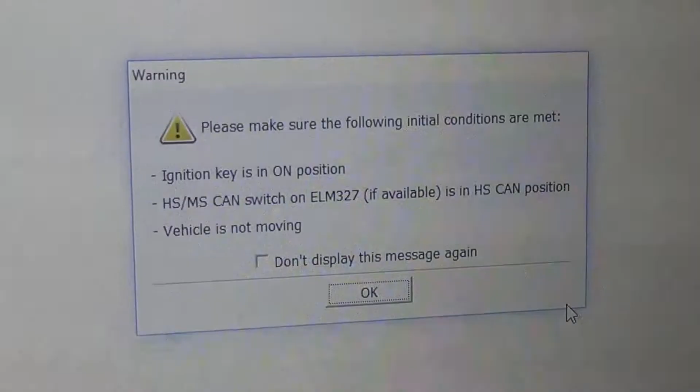So let's get started. Plug in your OBD2. Make sure it's on high speed. And then I will plug it into the laptop. Alright, next we'll bring up FORScan. So this is the initial screen. You want to go down here first to the connection symbol, connect, and it gives you this: ignition is on, make sure it's on high speed and the vehicle's not moving. Click OK.

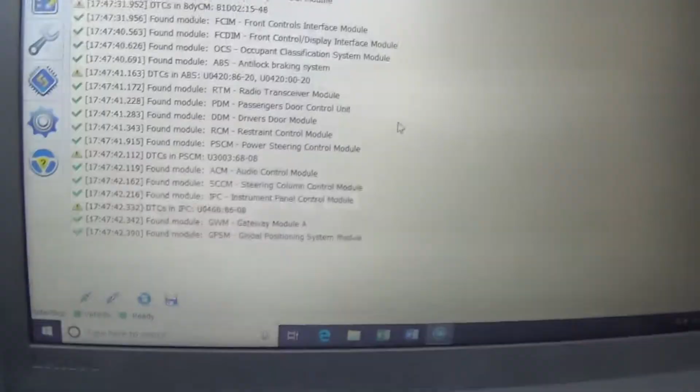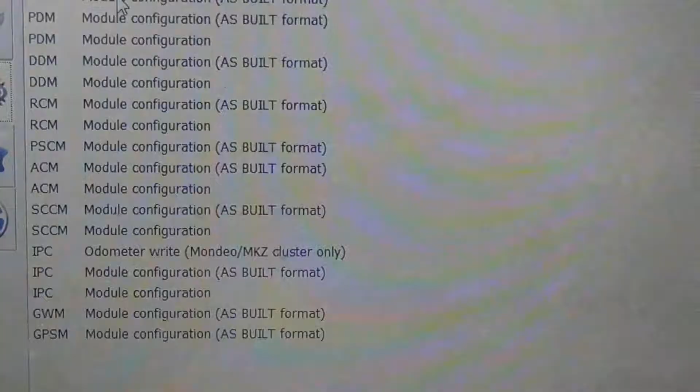This is my profile for the Fusion. Set your switch to MS or medium speed. Click OK. And we are ready. Alright. So there's two different ways to do this. I'm going to show you the first easy way. Go to your microchip here. And first one we want to do is the daytime running lamps. Now this one has it set up already, a little shortcut. So we're not going to go to the as built and change the code. We're going to go to the module configuration here. Down here at the bottom, click play.

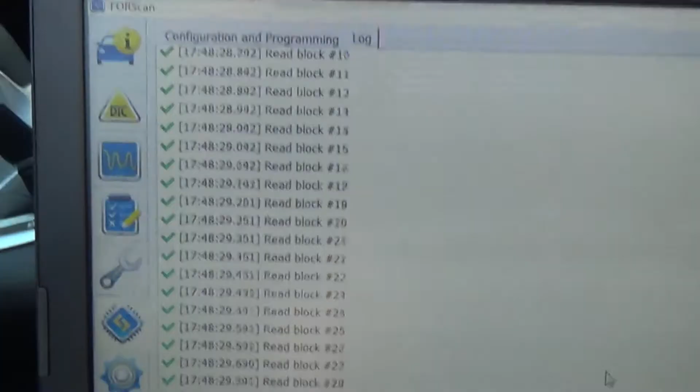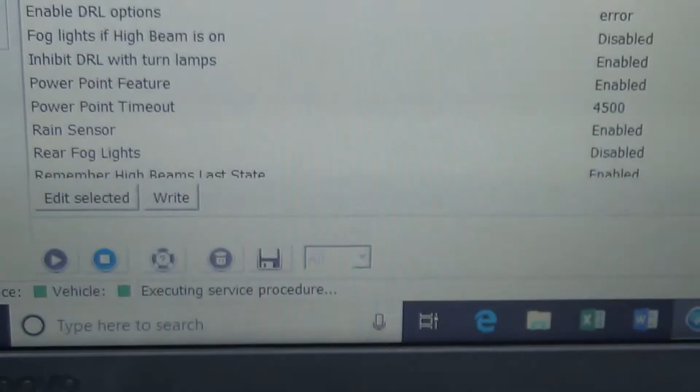Now it wants us to move into high speed. Flip the switch to high speed. Go back to the laptop, click OK. And here's all the blocks. So down here, this is what's cool, somebody's already created this, daytime running lamps. Right here. Highlight that. It says none, because it's disabled from the factory. So we will go down here, edit, selected. Brings up our little window. I want the low beams right here, number 2. So click the low beams, check mark. That's set for low beams.

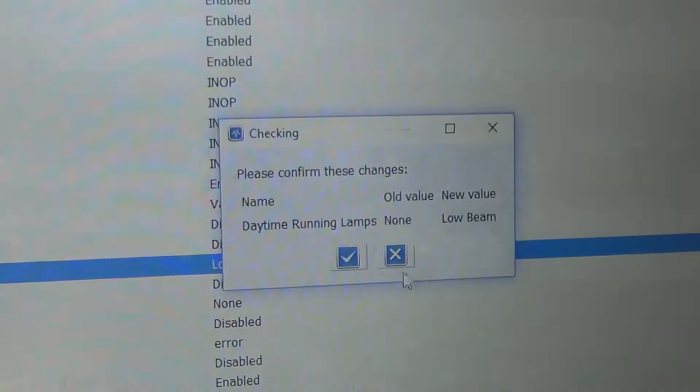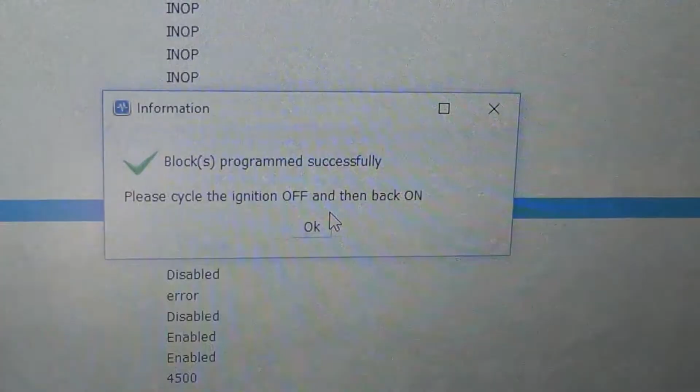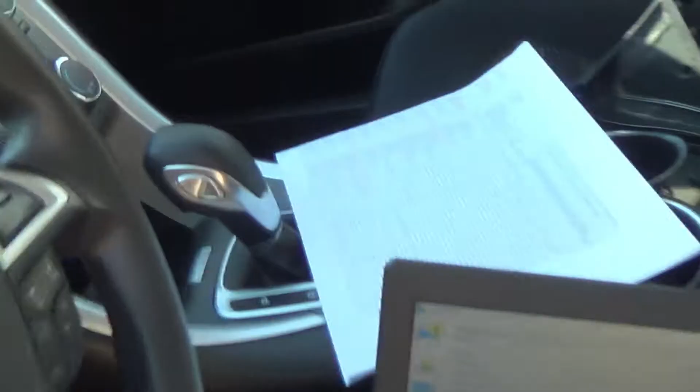Now what I want to do, come down here and click the write button. Another warning, please confirm these changes. Check mark. Everything flashes a couple of times, and then the program will tell you to cycle off the ignition and then back on. So I shut it off, I take the key out, and I give it a couple seconds. Okay, turn it back on. Down here we will click OK, and we'll verify this in a minute. I'm gonna make all the changes first. So we're done in this one.

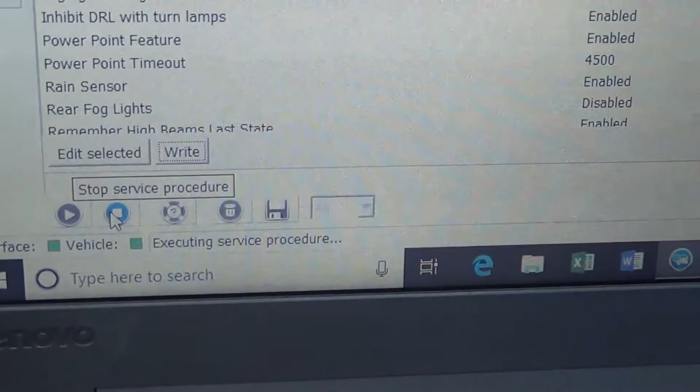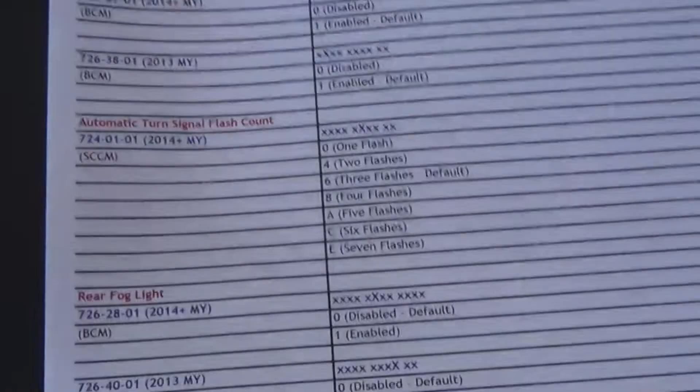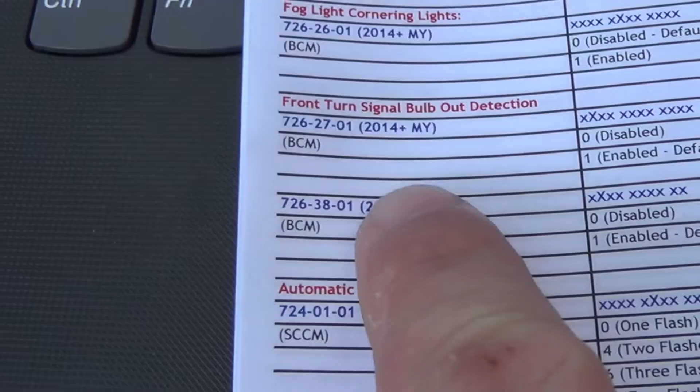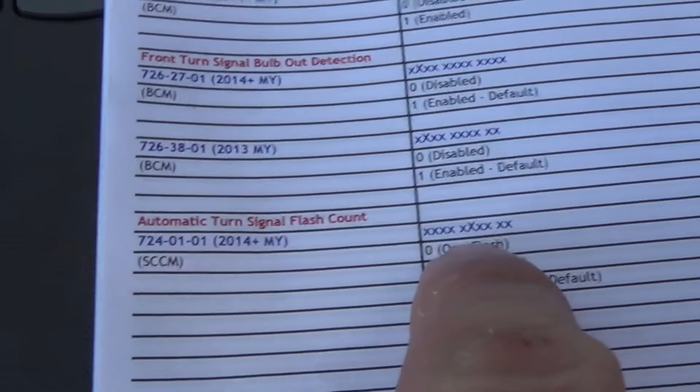So now we'll go to stop, and it'll bring us to our log. So we want to go up here and click configuration and programming again, and now we need to change some blocks of code. So take out my spreadsheet for the Fusion, and it's on the back page here. We want to do automatic turn signal flashes. Default from the factory is when you touch your turn signal, it does 3 flashes. I want 4. I did that in my F-150. It works out great. So we are going to go to the SCCM module, 724.01.01. We're going to change that second value in the second block of numbers to an 8 to give us 4 flashes.

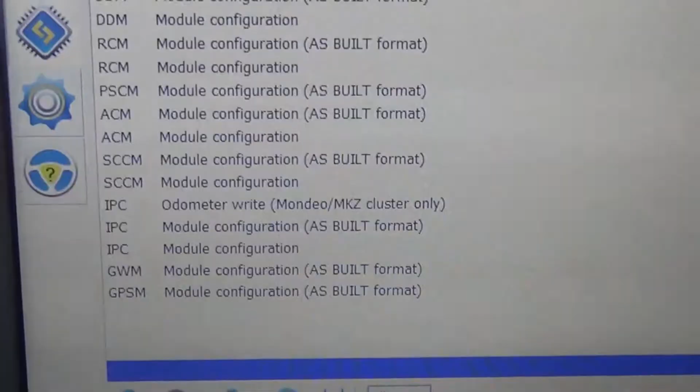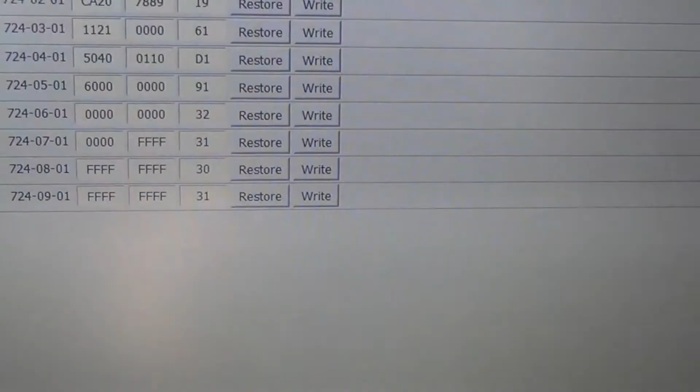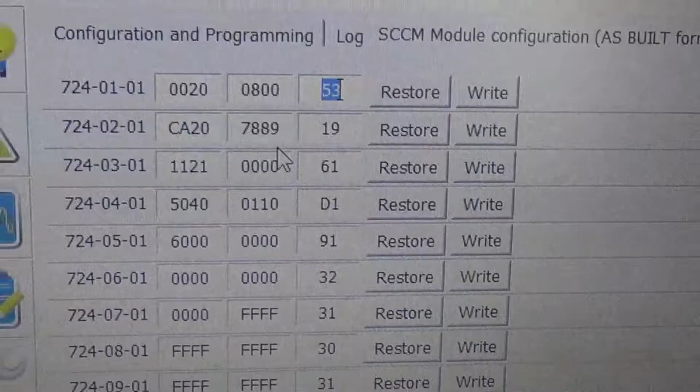So here we go. On here, we are going to go to the SCCM, and it's going to be the as-built because there's nothing set up for this yet. And then we will go down and click play. It needs to be on medium speed. Flip it. Go back up here. Click OK. Gives you a not safe warning. Click OK. Do this at your own risk. Now, here we are, 724.01.01. We want to change the second value in the second block to an 8. Bam, 8. Then we want to write it. Write. Checksum data error. Continue anyway. Yes.

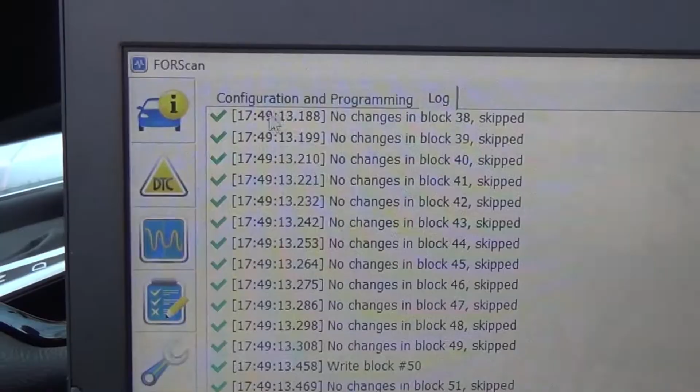Cycle the ignition. Off. Wait a couple of seconds. Turn the ignition back on. Click OK. Okay, so I'm confident in the changes now. So I'm going to disconnect altogether. So stop. Brings us back to our log. I want to go back up here to the top. That's our connection page. Now go back down here to the bottom and click disconnect from vehicle. Boom, disconnected. We're good to go. Close out the software. You can unplug your OBD2 port and we'll try it out.

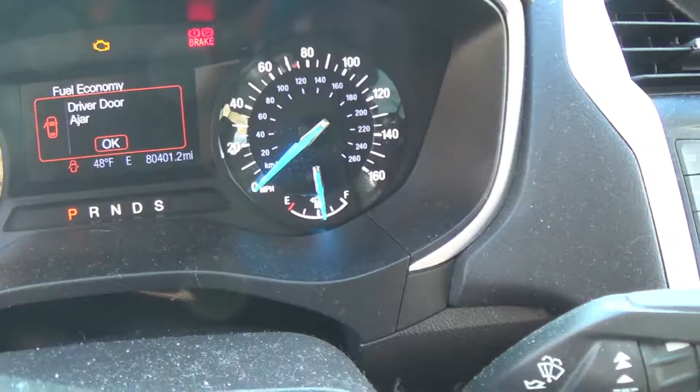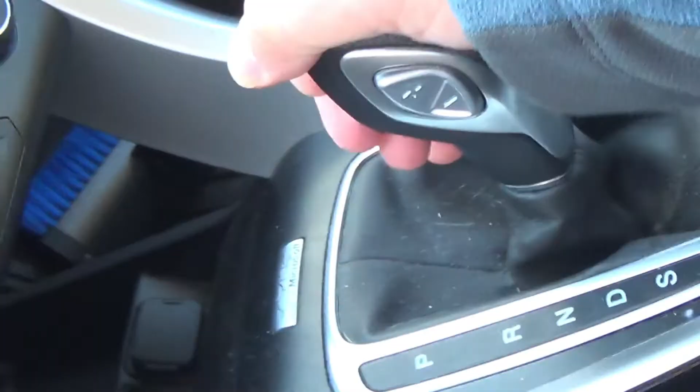Alright guys, so my key is on. Sorry for the glare. Okay, turn signals up here. So we're going to count them. 1, 2, 3, 4. That one's good. So, parking brake is on. It's the electronic. We'll put this guy into neutral. And there they are. So you got the daytime running lamps on low beams. I know it's hard to tell because of the sunlight right now, but it is on. Alright guys, so I'm kind of out of the sun here a little bit by the A-pillar.

Alright, so that's the easy way to do it. I've had practice on my truck. Now I took advantage of the wife's car and put the daytime running lamps on it and then changed the flashers from 3 to 4. So hopefully that's a quick way for you guys to see it being done. My previous video on the F-150 went a little extensive. I showed you the desktop video of clicking on everything, so hopefully this one summed it up a little better for you. So hopefully this helped you out.